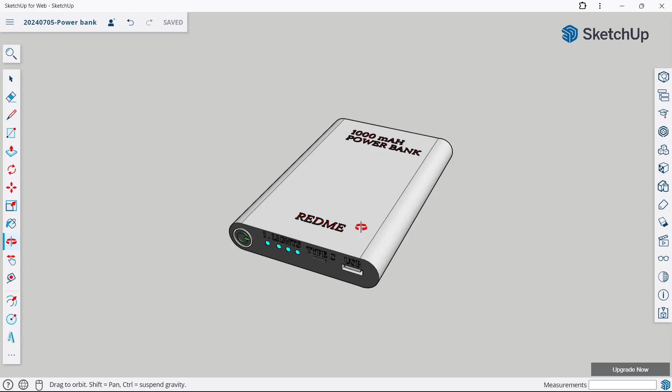Today we are going to make this power bank. So let's now start the video.

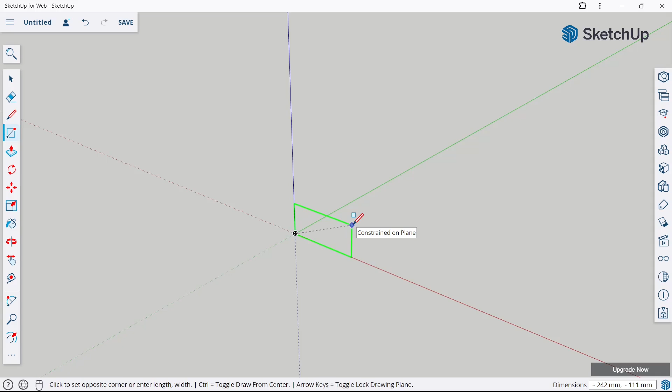So first let's create the body of the power bank. For this select the rectangle tool and make a rectangle of 300 comma 75.

Now choose the arc tool and create an arc like this. Again create an arc like this. Now choose the erase tool and delete these lines.

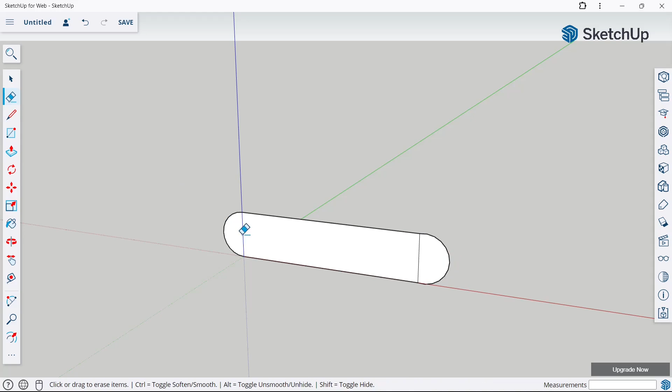Now we'll make push pull. Drag it like this and give the dimension as 600 mm.

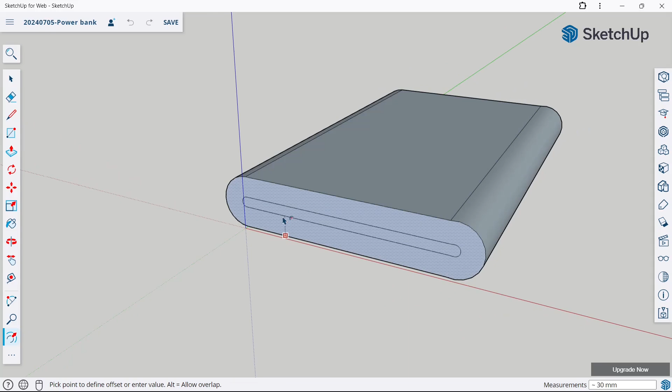Now choose the offset tool and give the offset of 5 mm. Now choose the push pull tool and give the dimension as 5 mm.

Similarly do this on back also. Choose the offset tool, give the offset of 5 mm, and choose the push pull tool and give the dimension of 5 mm.

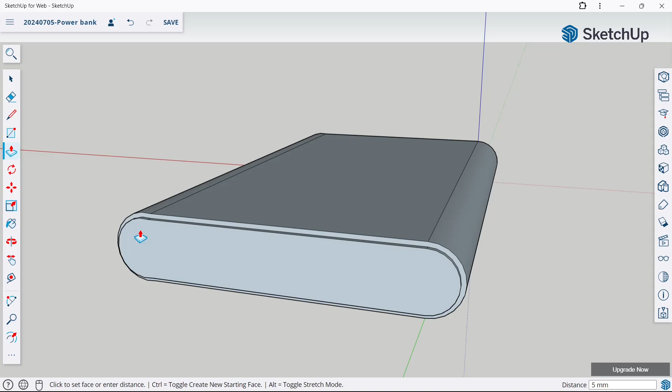Now choose the circle command and make a circle of radius 26 mm.

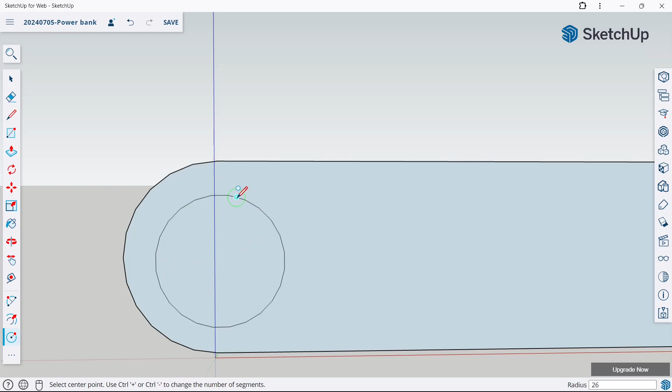Again make a circle of dia 23 mm and choose the push pull command and give the dimension as 3 mm.

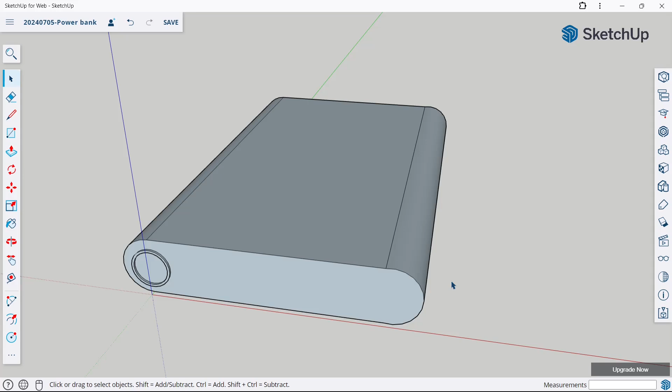Now we'll make the power on off button. Select the circle tool and make a circle of diameter 15 mm. Again make a circle of dia 13 mm.

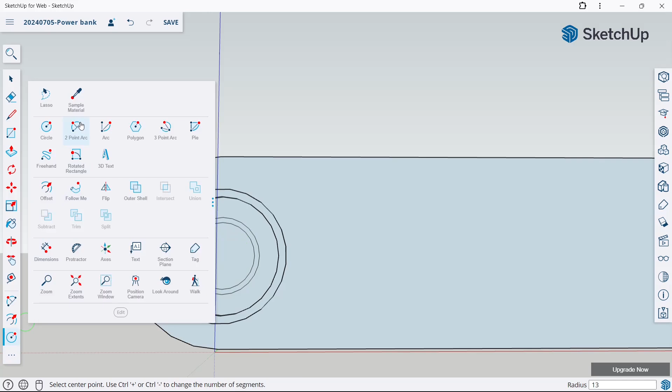Now choose the 2-point arc tool and create an arc like this. Again make an arc like this. Now choose the erase tool and delete these lines.

Now choose the rectangle tool and make a rectangle over here.

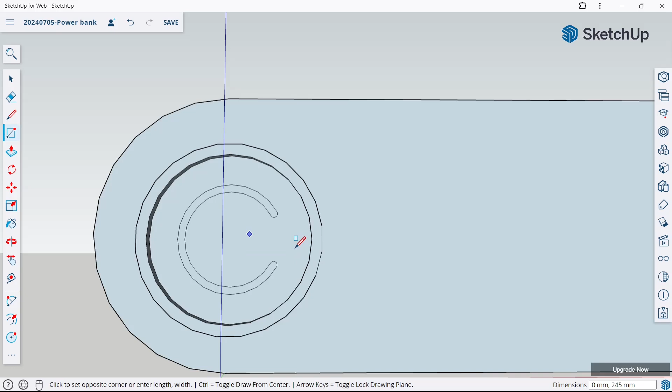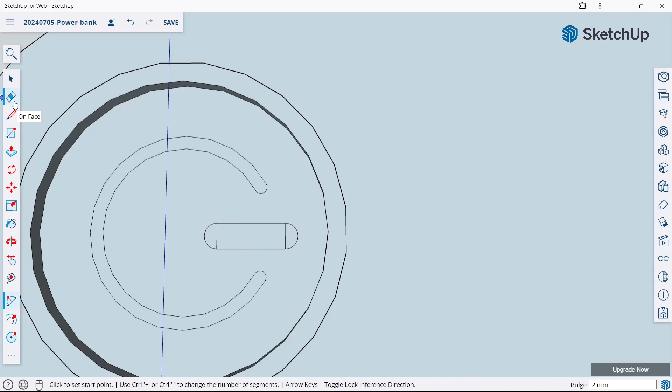Now choose the arc tool and create an arc like this. Again create another arc like this. Now choose the erase tool and delete these lines.

Now go to the offset tool and give the offset as 2 mm. Again give the offset as 2 mm.

Now we'll make the USB port. For this select the rectangle tool and create a rectangle of 15 comma 50.

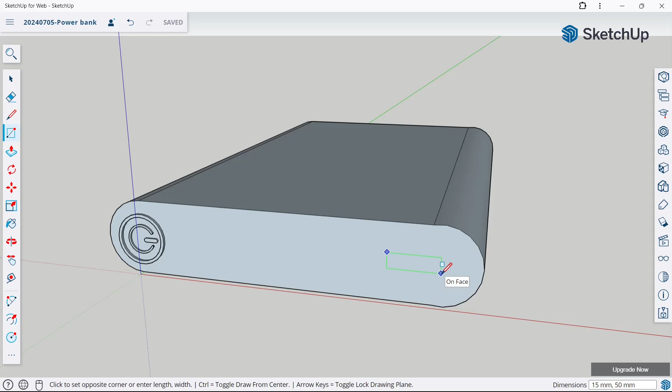Again create another rectangle like this. Now choose the push pull tool and drag it to 15 mm.

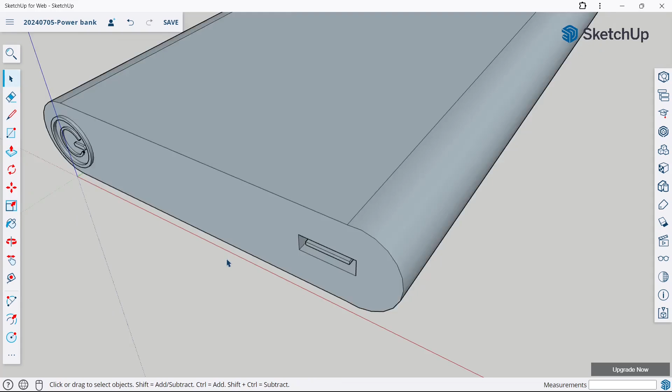Now we'll make the type C port. For this select the rectangle tool and create a rectangle like this. Now choose the arc tool and make an arc like this.

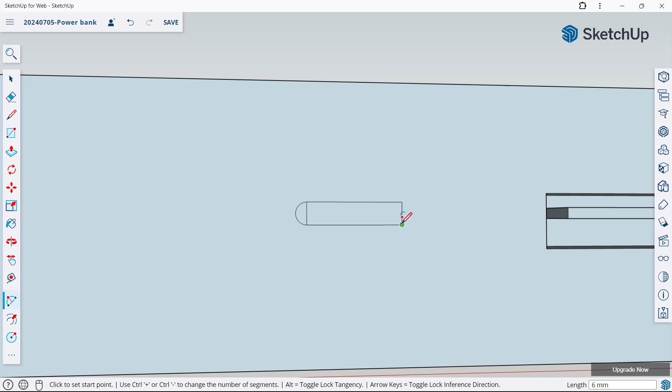Again make an arc like this. Now choose the erase tool and delete these lines. Now choose the offset tool,

give an offset of 3 mm. Now choose the push pull tool and give dimension to 4 mm.

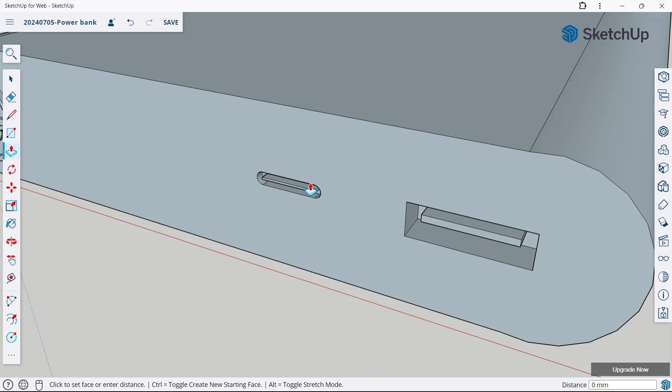Now we will make the charging indicator lights. For this, select the circle tool and make a circle of 6 mm. Again, make a circle of 6 mm.

Another circle of the same 6 mm. One more circle of 6 mm. Now choose the push pull tool.

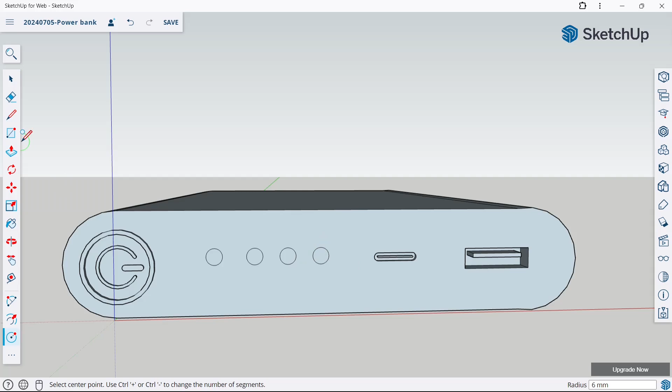Select the profile and give the offset of 1 mm. Again 1 mm. Again 1 mm. Again 1 mm.

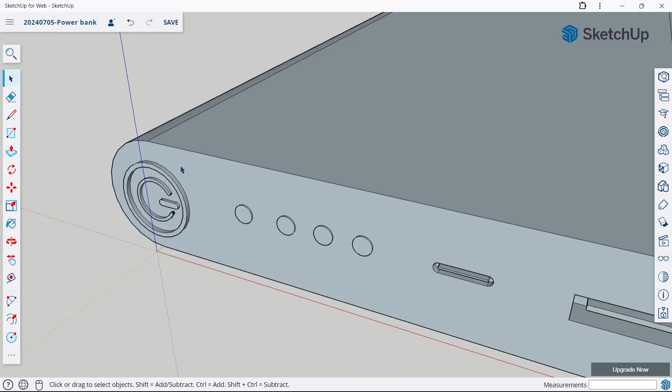Now we'll add the text. For this, choose the text tool and first we will give for USB port. Type USB here and click OK and click it over here.

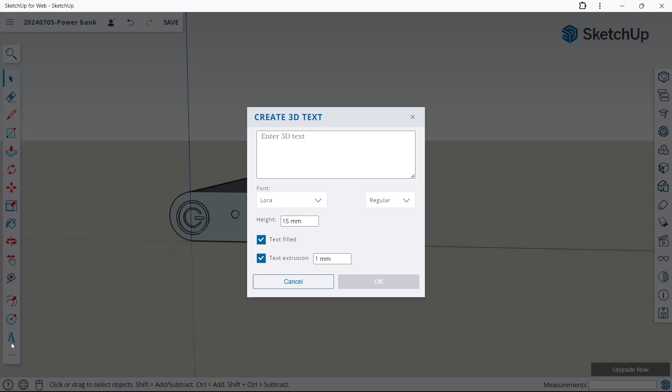Now we'll add the text for Type C port. For this choose the text tool, enter Type C, click OK and click it over here.

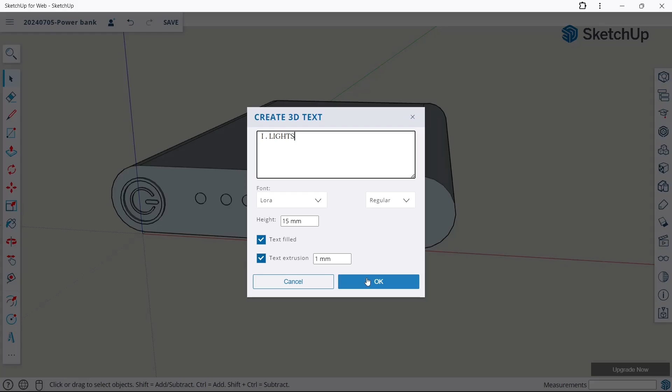Now we'll add the text for indicator lights. For this, again choose the text tool, enter indicator lights, click OK and place it over here.

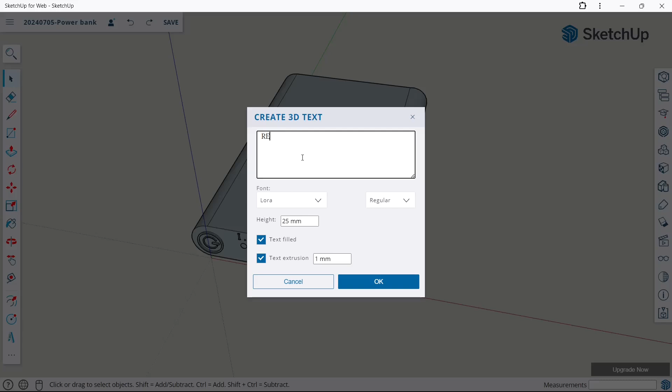Now we'll add the company name for the power bank. Choose the text tool and type Redme, click OK and place it over here.

Now let's add the capacity of the power bank. For this, choose the text tool and enter 1000 mAh

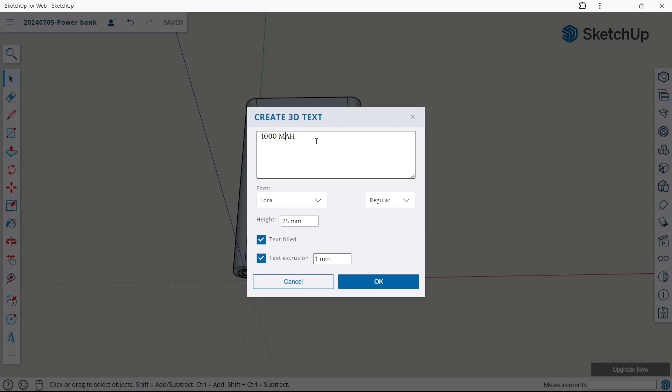and also write the name power bank. Click OK and place it over here.

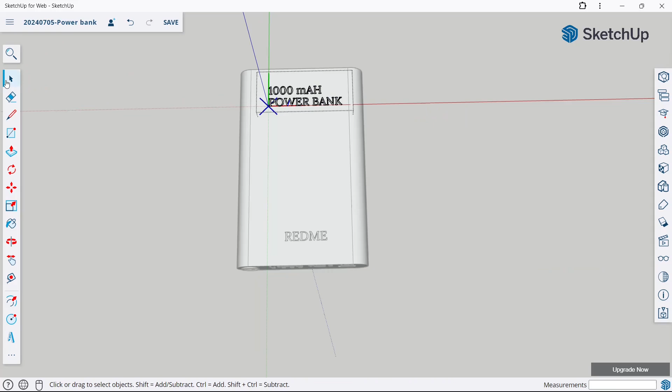Now let's color the power bank. Go to colors and I will choose the white color.

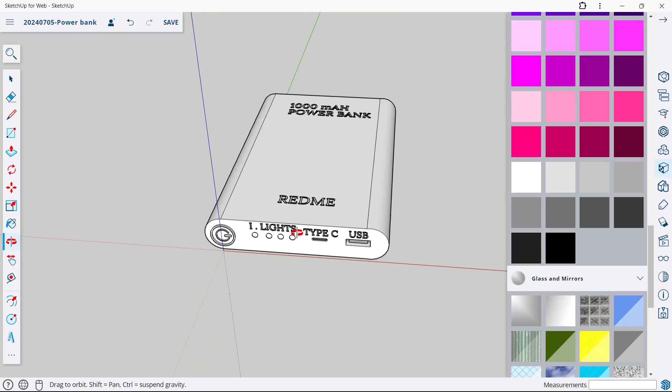Here I will add black color, back side also black color, and for the power button I will add this green color.

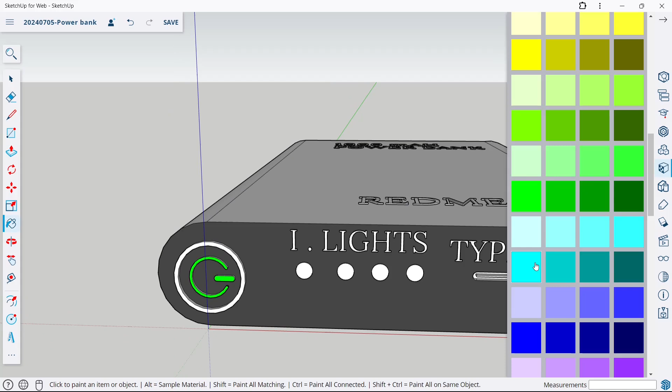For the lights I will add this color, and for the text I will add red color.

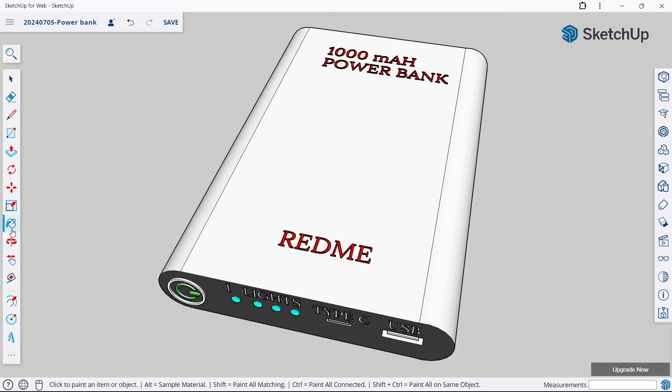Now as you can see our power bank has been created.